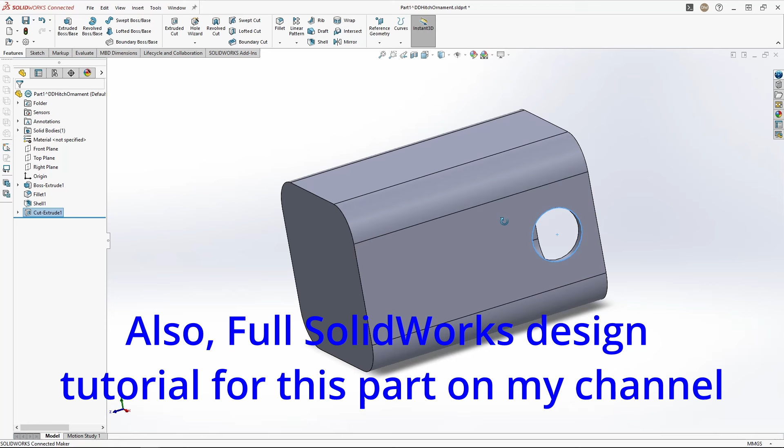Now we'll sketch the shape of the tensioning tab on one face. The purpose of this feature is to keep it from rattling around in the hitch. We'll use the offset command to create a cutout and extrude it through one side.

Now we'll revolve a little raised dome on the face of this. This is the portion that will actually interfere with the inside of the hitch.

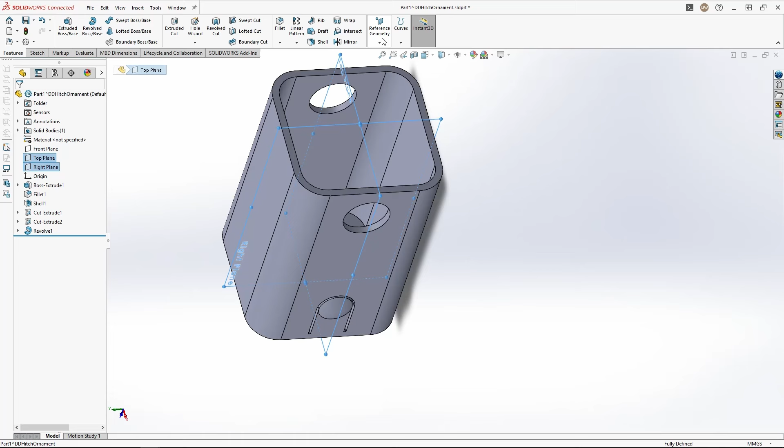Now we'll make an axis in the center of the part and make a circular pattern so we have one on each face. We'll put a little chamfer on the inside of each one of them to strengthen them up a bit. Now we can start developing the transition to the face.

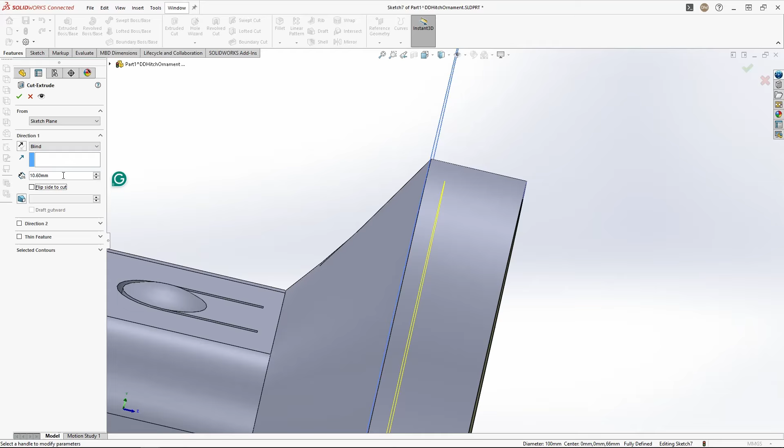We'll do this by creating the face shape on a new plane and then lofting between the two. Then we'll do an extrude cut in the opposite direction to give the LEDs a place to live. Now we'll do another extrude to create a ledge for the face to glue onto.

I decided to modify this hole to make it easier for the printer to print it. I'll do this by adding 45-degree straight edges to the top of it. Now let's add in the hole for the LED wire to pass through.

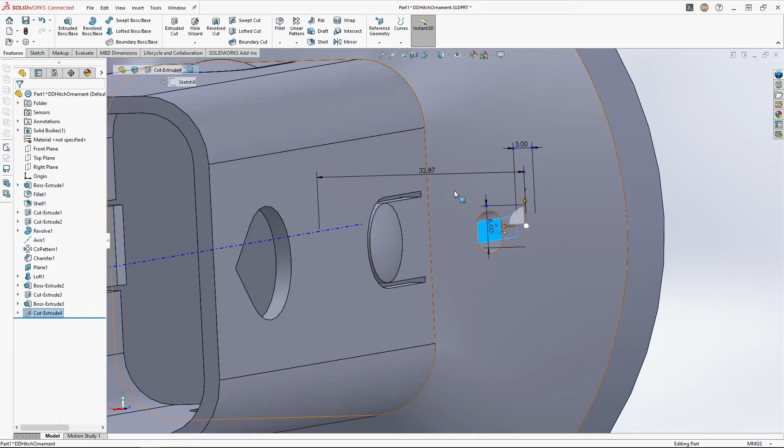Okay, now we can start making the face of this. I'm going to start by making the outer diameter, giving it a thickness, and then get totally distracted by changing the color of the main part.

Now that I'm back on track, we'll add mates to put the face in the proper place, and then adjust the outer diameter of the face so it has some clearance.

Now let's jump back into the part file for the face and add the Dan Designs logo to it. Now we'll use the sketch, scale, and move commands until we have it where we want it.

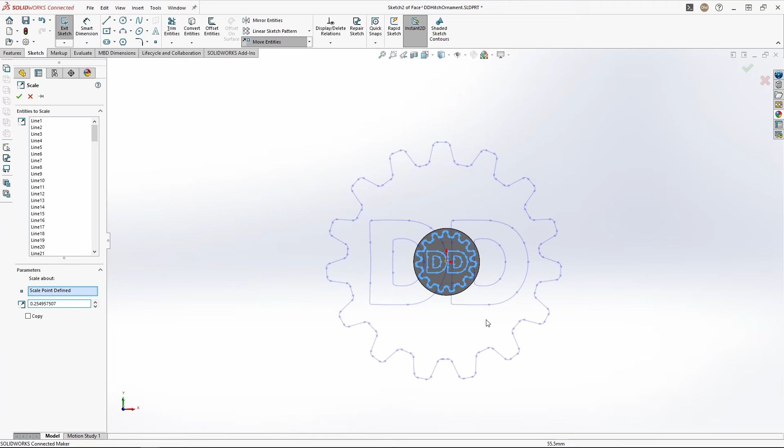Now that we have it nice and centered, we'll extrude it to give it some thickness. Now we'll make the extruded part a nice Dan Designs blue and pop back over to the assembly to see the finished product. Then we can send these parts over to the printer and make them real.

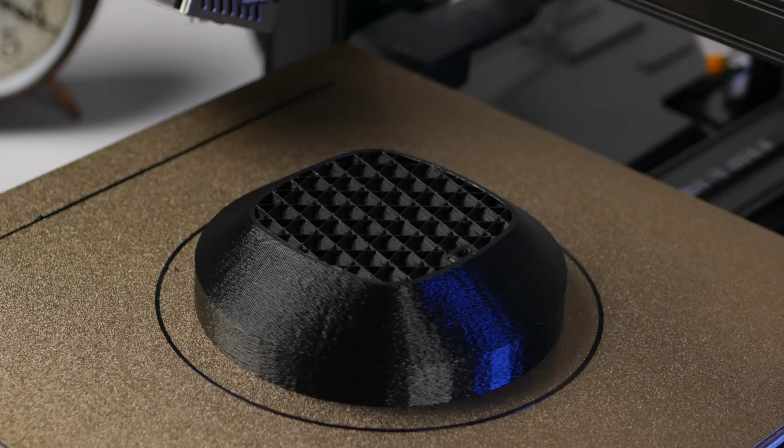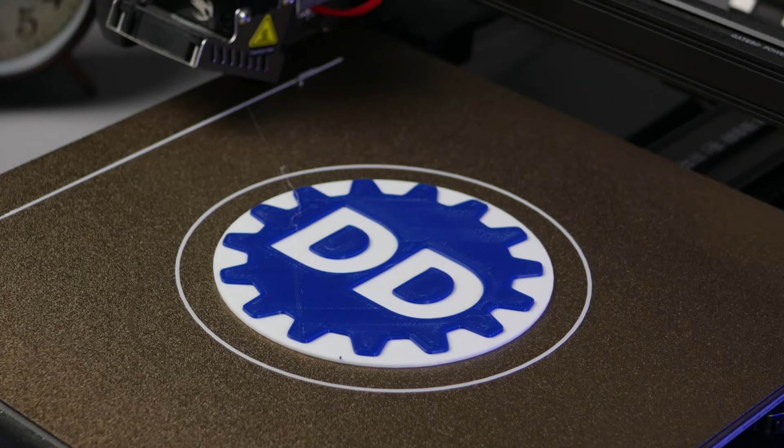Okay, first things first, let's remove the support material.

I think this looks really nice. I printed this with a fuzzy skin and I think it came out real well. Looks like the tensioners work well. Alright, let's put the lights in.

I chose a pure white outdoor LED strip off of Amazon, link in the description.

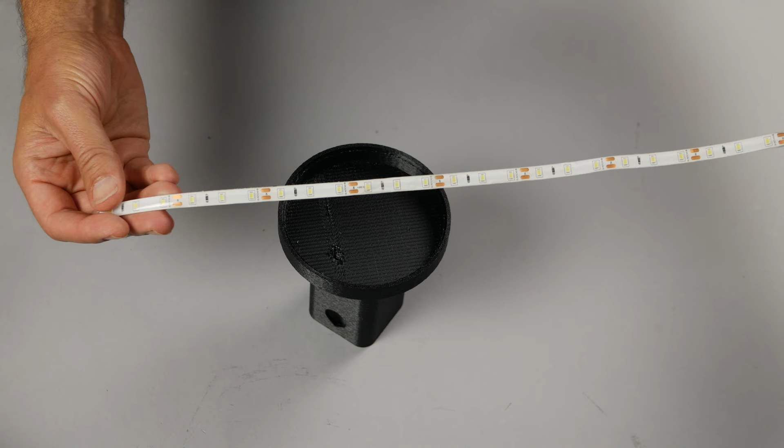I'm going to do a quick install to find out what cut point I should use and then cut it right in the center of that cut point.

Now let's check to make sure that length works properly. It should, because we purposely designed the inner diameter of the base to work with these cut point lengths. And look at that, fits perfect.

Now let's expose the contacts on one end and then we'll cut off the excess cover.

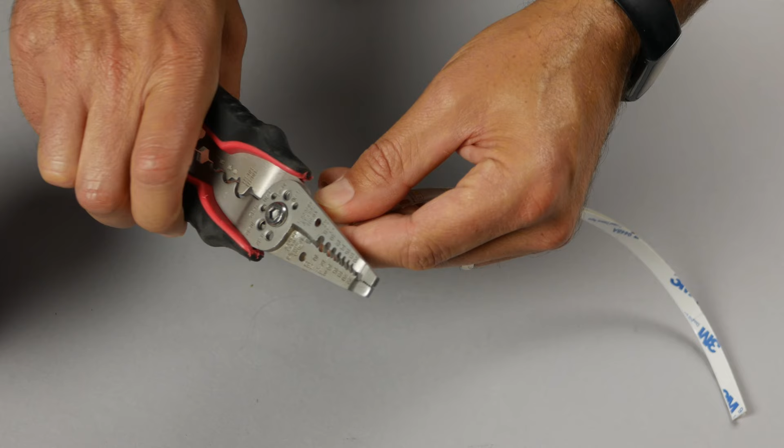Now let's tin both of the contacts. Tinning is just the process of melting a little bit of solder on each one. Pre-tinning parts makes it super easy to solder parts together.

Now let's measure out 17 inches of lamp wire and cut it to length.

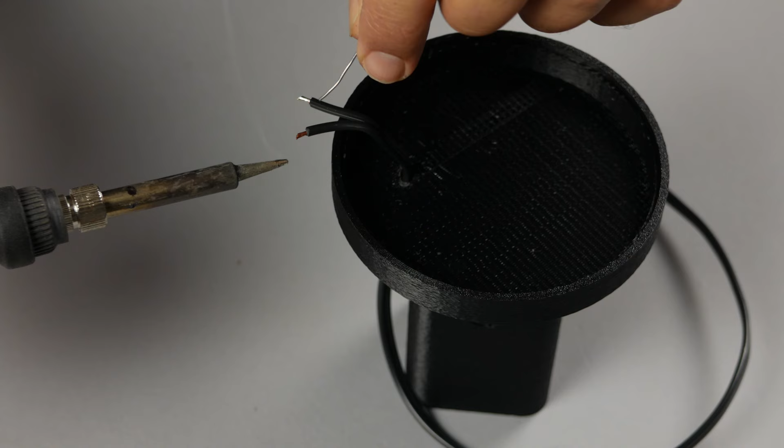Now we'll solder the tinned end of the LED strip to the wires. I'm sure there's a better way to do this than in midair, but where's the challenge in that?

Let's position the LED so it'll stick to the side and remove the backing. Now we'll slowly work around the inner diameter, sticking the LED strip to it, making sure the whole strip gets adhered properly.

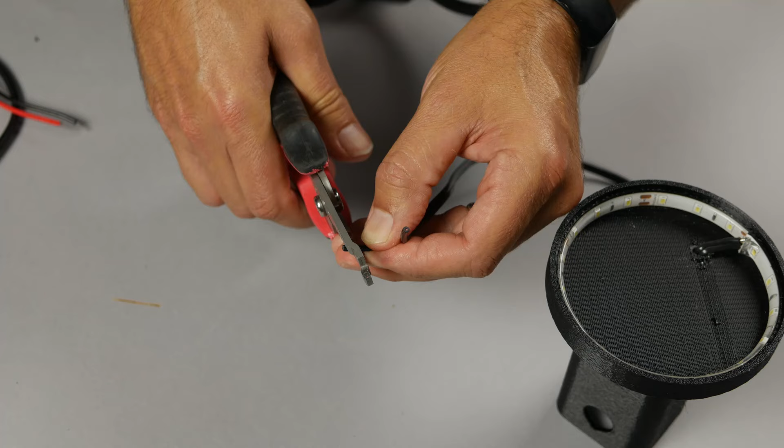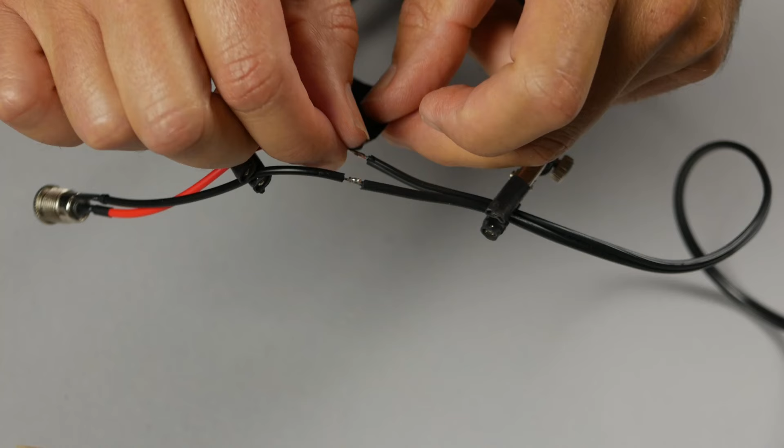Now let's prepare the other end for a lighting test so I can make sure everything works before we glue this thing together. To do this, I strip and tin the ends of the wires and attach a temporary socket that matches my AC adapter to the end of it. I'm going to use a little electrical tape just to protect the wires from shorting out.

Now for the moment of truth. Works great.

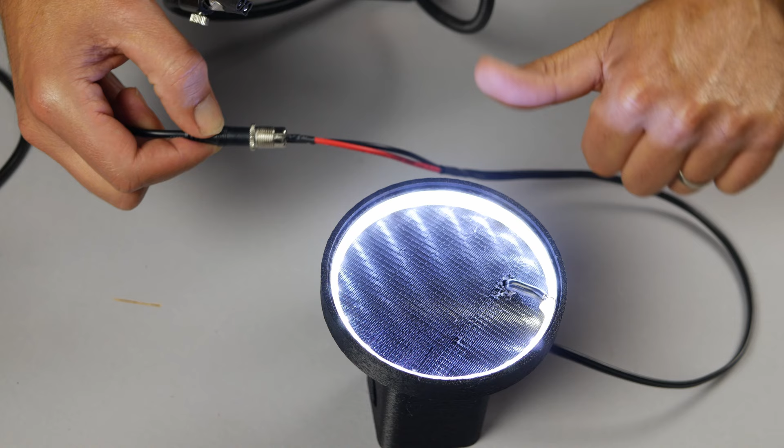Okay, onto the face. I really wanted this thing to be gray and black, but after playing around with it for a little bit, I realized that the gray filament doesn't let light pass through at all. So I moved on to the white, and as you can see, it lets light pass through really well. So that's what we're going with.

Another thing I realized after a little bit of testing is the light wasn't too consistent lighting the face, and this was due to the black surface here. So I printed a white cover for this to act as a reflector, and this helped the surface illuminate a lot more consistently. So I just glued it in place and set a weight on it and set it aside for a bit to cure.

Okay, now that that's cured, we can glue the faceplate in place. And I used E6000 glue for this. I normally use super glue, but I figured this might give it a little bit more weather resistance and also a little bit of flexibility to stand up to the vibrations a little bit better.

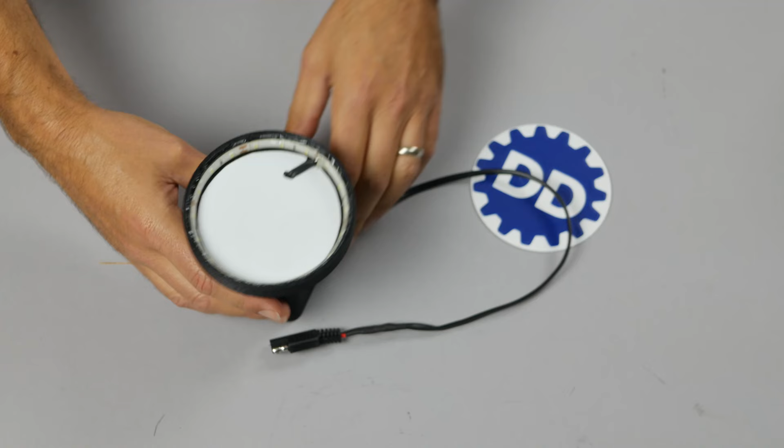Okay, let's make sure we got this thing right side up. Now we'll set the face in place, and make sure it's all pressed down into the glue. Then we can set it aside to cure.

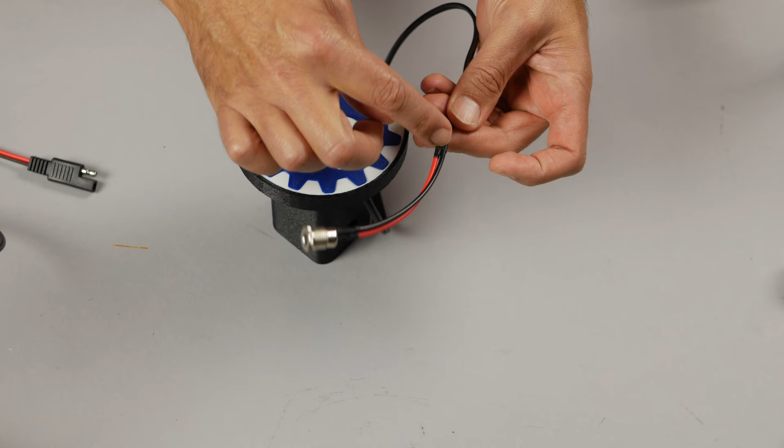Okay, now to finish this thing up, we need to put the proper end connector on so it'll attach to the trailer light plug on the truck. So first we have to remove the temporary plug.

But before I do that, I'm going to use a piece of electrical tape to mark which side is the negative. Now I'll just heat the solder until the temporary plug falls off.

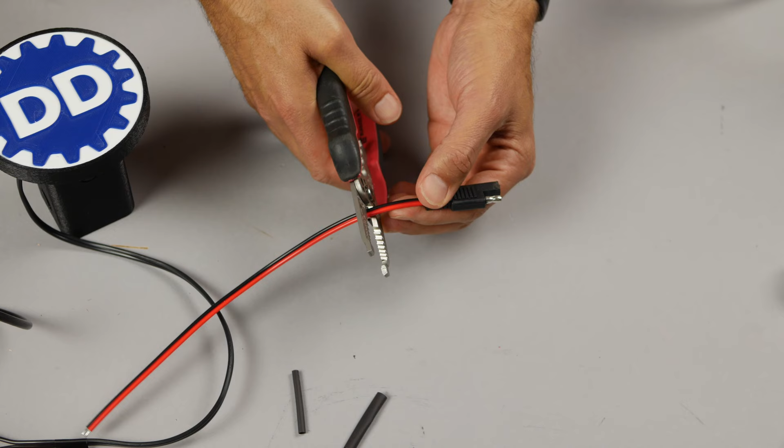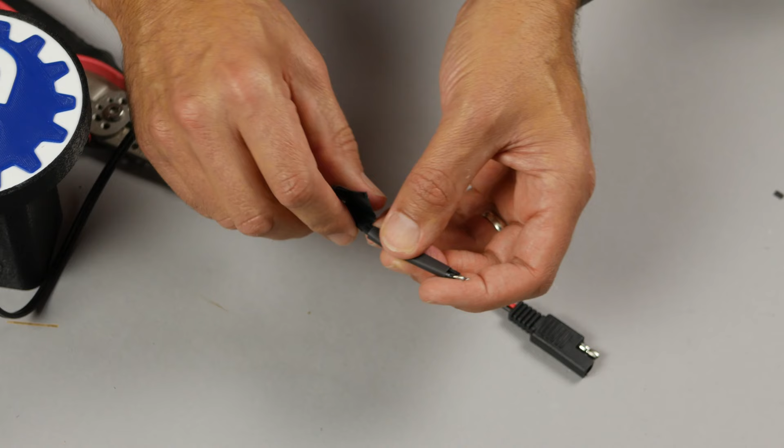The new plug is way too long, so we'll cut that to length and strip both ends. Then we'll install some shrink tube on the wire. I wish I would have thought of that before I put the electrical tape on here.

Now we'll cut the shrink tube in half and put one of them on each one of the separated wires. Now we'll tin all the ends so we can solder them together easily. Now that we have them all tinned, we can just melt them together to create a good connection.

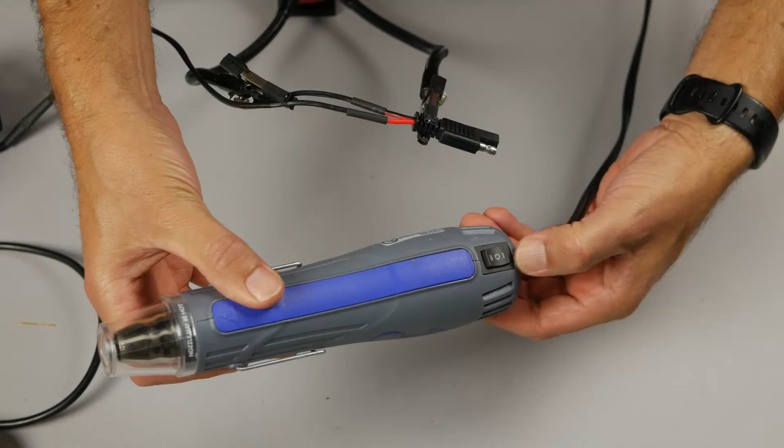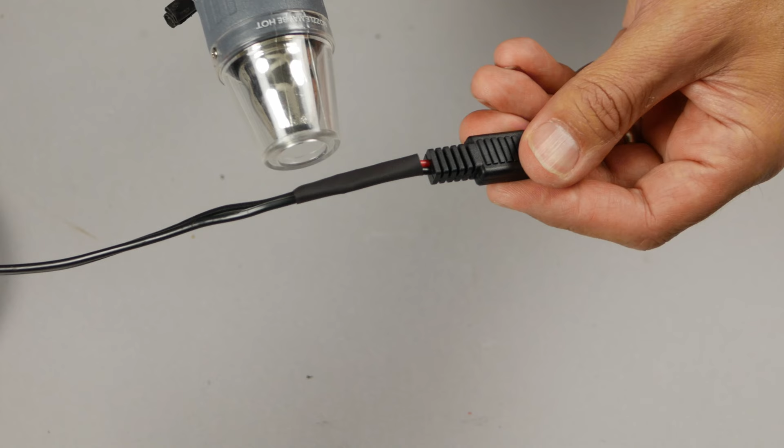That looks good. Now we can move the shrink tube in place, fire up the heat gun, and shrink the tube. Now we can move the larger shrink tube in place to cover the two smaller shrinks, and shrink it to create a nice protected connection.

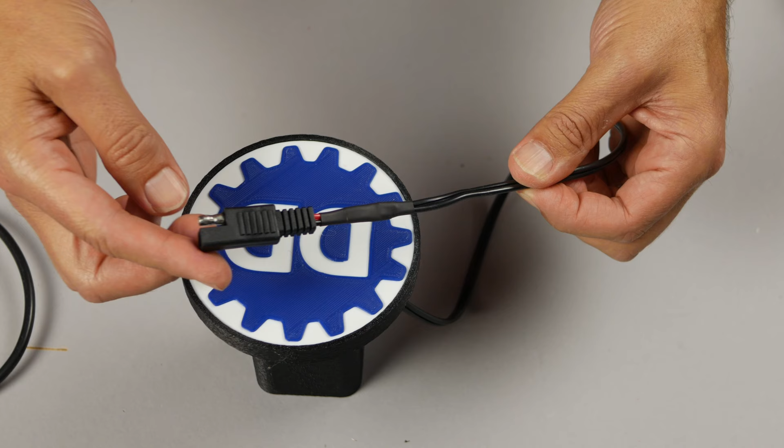That looks good. Looks like we have a finished product. Now let's try it on the truck.